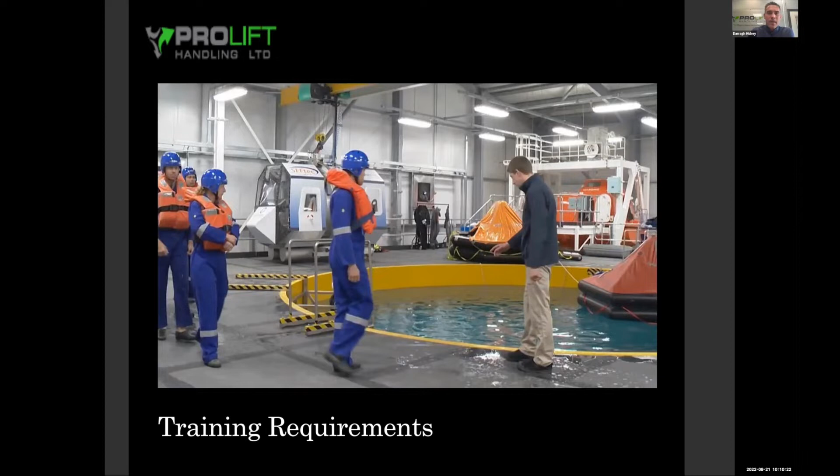So first and foremost, guys, before we kind of get into the training itself, it's important to know what type of engineer should actually be expecting turbines, because there's no point getting an engineer involved and then we find out that he's afraid of heights and you have to spend €20,000 on training. And it's happened. It might sound silly, but from our experience, we're doing this about seven years now for the turbines. A fitter background or a trade background is ideal, whether it be electrician, hydraulics or fitter.

There's some pretty technical products in the turbines, such as the service lifts, and they require assembly, dismantling, inspections, and repairs. So it's not just a general inspector that would examine chains and lifting accessories. Ideally, a fitter background is required.

As I said, they can't be afraid of heights, guys. You're up 100 meters in the air and these things move. When you're on top of the turbine, they move with the winds, and they have to move. And then you're climbing ladders 80 meters tall, so you have to be physically fit to do the job.

It might sound really obvious, but these are the questions you have to ask yourself. If you have a team of 10 engineers and you're thinking one engineer should inspect it, go through these questions and find out who will be the best after all of this.

And they have to be comfortable around water, obviously, because it's a water training course. And good with training courses, whether online, and fit to travel, able to travel to Germany like our engineers have for the actual Hailo lifts.

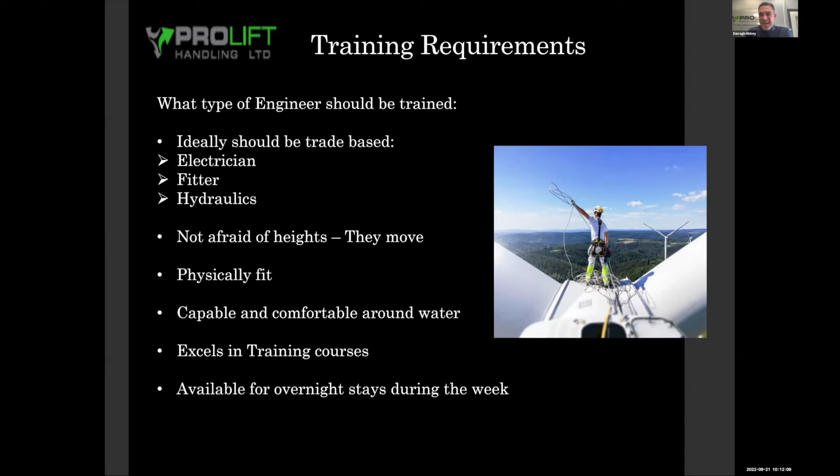The last point, guys, is these turbines are sometimes in remote places, so your engineers have to be willing and available to stay overnight. Like I said, there's no point in spending 20,000 on training, everything's great, but 'can't stay away this week, lads' - it's not going to happen. So they're just the little things to look out for when deciding what engineers should be trained.

When I move on to the actual training, guys, it's the GWO training that's really mandatory, and that's the Global Wind Organization. They're a bit like LEEA - they set the standards for a safer, more productive workplace, but specifically for the wind turbine sector.

They're a non-profit body, founded specifically for the industry itself. The standards are created by the industry for the industry, and that's very important because you have all stakeholders involved in the industry helping to push the standards. That's the only way standards can improve the whole time, with real-time feedback from all the various stakeholders.

The members are the global leading turbine manufacturers and the owners - like state bodies, and manufacturers like Vestas, so to speak. They're all involved in this GWO, and basically they identify areas of concern and try to develop a course around that to push the standards.

So the mandatory courses, guys - we do the turbines ourselves here in Ireland, and there's about 5 days of training that's mandatory, and they're all GWO courses. The first course you have is the GWO Sea Survival and Boat Transfer course, which is 1 day.

That basically goes over water safety. You'll be in a swimming pool, you'll learn how to deal with falling into the water, how you get out, and stuff like this. Because the sea can get pretty rough out there, and you have to wear the right gear. So it's a priority that your guys are prepared for this - if something does go wrong, what do we do?

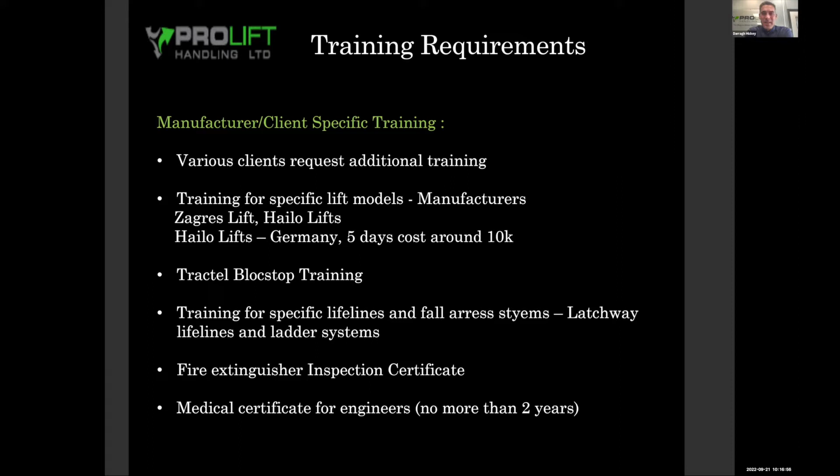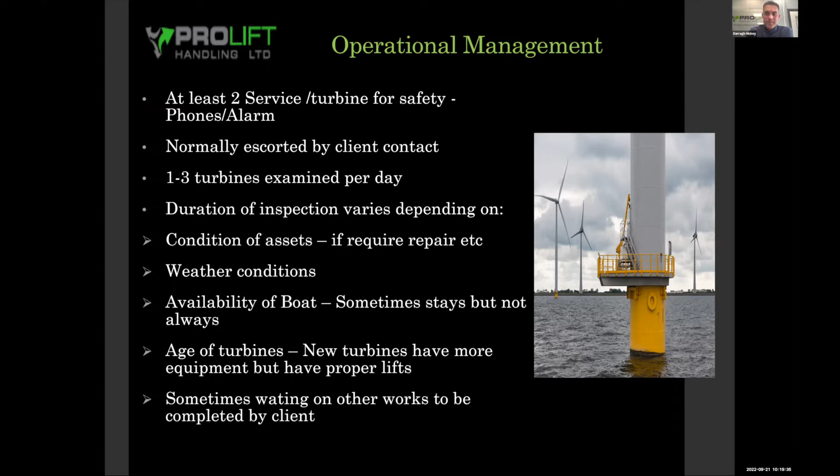And then finally, like I said, sometimes we have to wait for the client to finish their maintenance works until we can leave that turbine and go to the next turbine. So that just kind of gives you an overview of the amount of engineers required and things that can delay the examinations of the equipment within the turbine itself. And then we just have the 7 steps for planning, really.

So, step 1, make sure all our risks are controlled, check for good conditions of all equipment. These are basics before any job. We must have our certs for all the equipment we're going to use, our load cells must be calibrated, the basic stuff. That's the same for the offshore turbines themselves.

The key one here is plan activities in advance. You can kind of get an idea of what weather's coming the next 3 or 4 days. So our service manager who's booking in this work keeps an eye on the weather. He's in constant contact with our clients to book in some days. And there will be situations where you have 3 engineers booked up for the week, everything's good on the Friday, come Monday the weather changes and that job is cancelled, and you have to find work for those engineers as well. That's the reality of the situation, and it does happen, for reasons beyond our control, such as the weather itself.

Number 3, only authorized trained people, and that goes without saying. It's a very regulated industry. Your engineers have to be up to speed. They have to have all the correct certifications. You have to have their certs on you. We give them access to the certs via an online portal as well.

And then you have to wear the right equipment, whether it be the immersion suit, the life jackets, your walkie-talkies, and then you respect the rules during the transfer. Each boat will have their own specific rules, but they don't change too much. When you do your GWO course, they specialize in the actual transfer itself, what to watch out for and how to do the transfer.

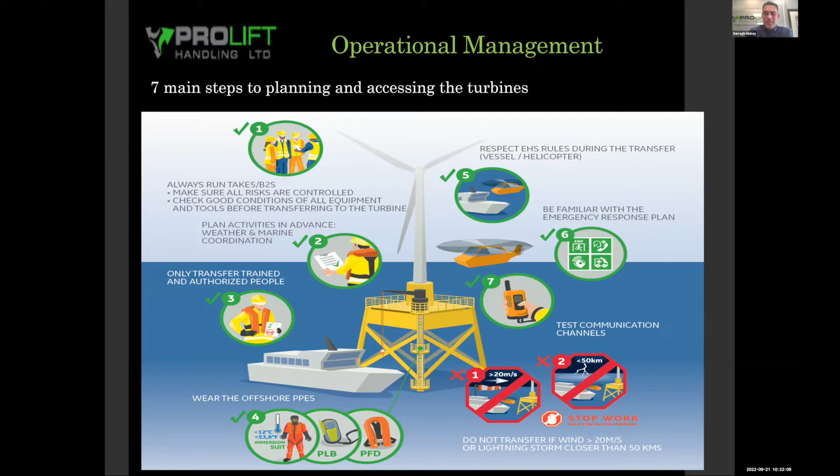So what equipment is examined in turbines? Well, there's a fair few different types. We have the service lift itself, which is probably the most technical equipment, whether it be an Avanti or a ZARGES lift. There's lots of ladders, safety lifelines, general height safety equipment such as your harnesses, your lanyards, your retractable blocks. We have electrical chain hoists, gantry cranes, davit cranes and jib cranes.

Then we have lifting accessories such as your shackles, web slings, chain slings, lifting points. And probably the most popular item by far is the man riding anchor points, which are scattered all over the turbines. As I said, that's the lifting and height safety equipment. We also do the fire and auxiliary equipment, first aid supplies, and the accumulators and pressure systems.

Some clients do this themselves. In my experience, it's good to offer the whole lot, because what you want to alleviate is the expense for the client, where someone goes on, does all the lifting equipment and accessories, and you have someone else come on to do the first aid supplies, the auxiliary, the fire equipment, and the accumulators. So if possible, I think it should put you in a better position if you offer all of those items to be examined, more so than just the lifting and height safety equipment as well.

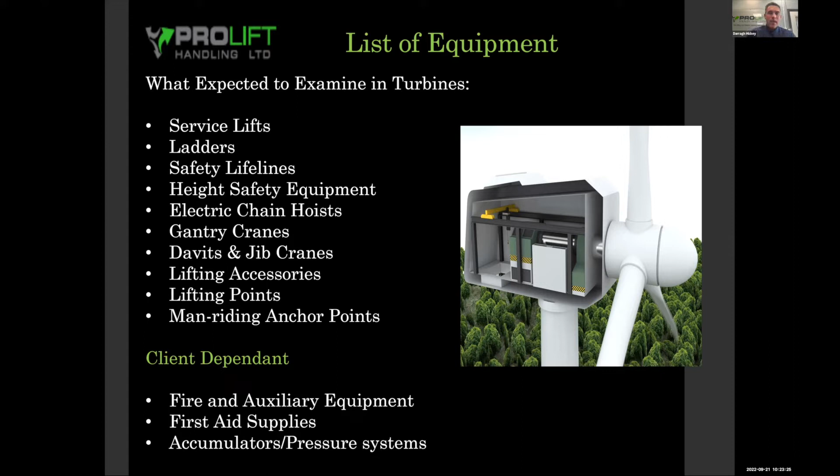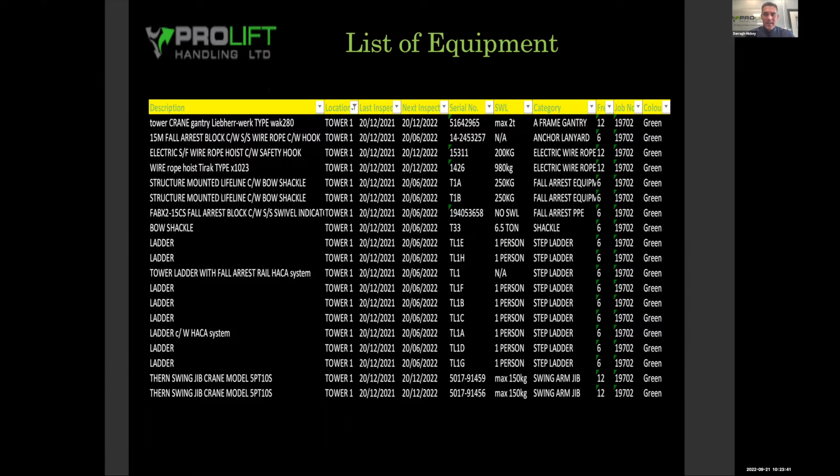That's a basic list of equipment in relation to one of the towers we did in Arklow. It's just a little snapshot of what's involved. We have a tower crane Liebherr, a 15-meter fall arrest block, a wire rope hoist, a Tirak, bow shackles, ladders. And just to give you an idea, out of that actual tower, there's 12 man riding anchor points and six lifting points. There are shackles, davits, ladders.

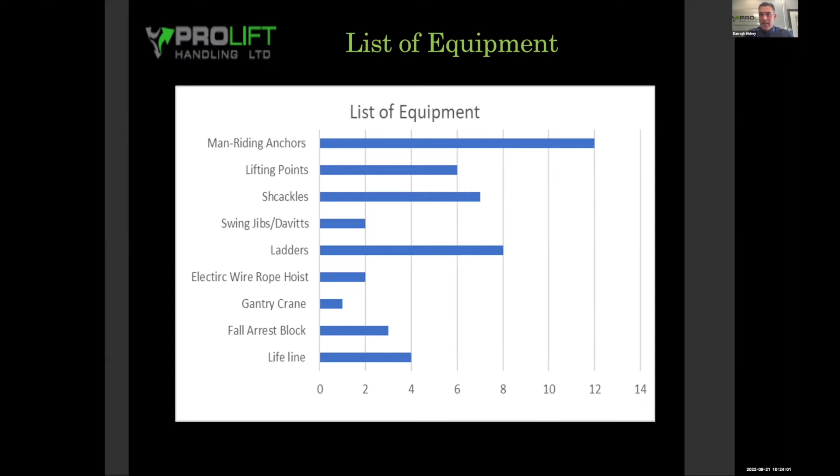But as I mentioned previously, these are older turbines that we do. So there's only about 40 assets, whereas with the new larger turbines, there could be anything from 90 to 140 assets. So that has to be kept in mind as well. The turbines are about 20 years old. There's no service lifts on them, so this sometimes slows down the work. And you're up and down the ladder, so this is why health and physical fitness is very important for the service engineers.

Modern turbine considerations: the service lifts are the most technical product on the actual turbine itself. And if you're doing the lifting equipment, that falls as part of the height safety equipment as well. You can't do one without the other. They won't send two different companies on to do this. These lifts need to be stripped, inspected, measured, and reassembled. They'll take 2 to 3 hours, that's if everything is good. Sometimes you'll find a problem that you have to deal with, and then that could take the whole day. There could be spare parts shipped out as well.

And like I said, it's an 80-meter Latchway ladder, and it must be inspected. How you inspect the ladder is you actually climb up the ladder. You're harnessed on, obviously. You climb up, you check the rungs for deformation, you check the spacings and everything like that as well. But it's a long way up, 80 meters, climbing a ladder, inspecting it. So that can take up to an hour as well.

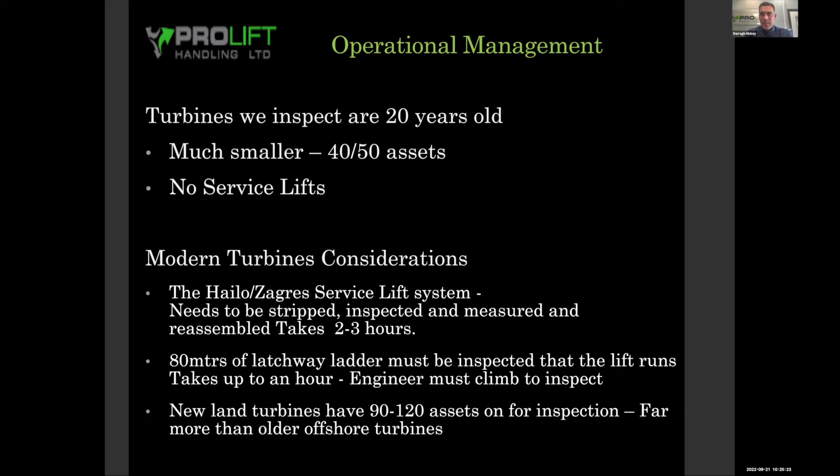I mentioned previously the new turbines of 90 to 120, it's up to 140 assets really. So far more than the older offshore ones that we have. But I know for a fact the newer offshore ones that will be coming over the next few years will have that amount of assets as well. So it's going to take longer to do the actual examinations. That's just a breakdown of the modern turbines that we do on land. Like I said, there's none offshore at the moment, but there's 72 fall arrest anchor points. That itself takes quite a while to do.

All the new turbines have service lifts also. But with the service lift, guys, you examine the lift, you do the maintenance, but you also have to inspect the structure the service lift goes on, whether it be the ladder or the ropes as well. So even with the service lift, you have to climb these to make sure everything is okay. Just because it has a service lift doesn't necessarily mean that the job is quicker. And we do first aid kits, lifting bags, fire extinguishers. So the same type of equipment as the offshore turbines, but just more quantity as well.

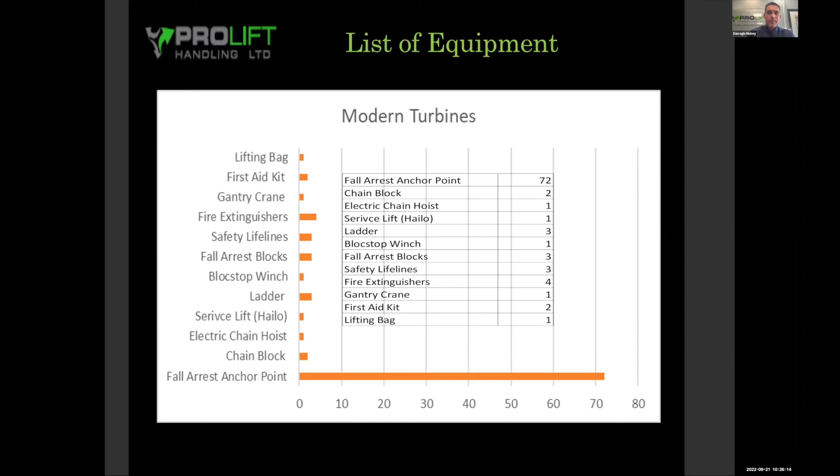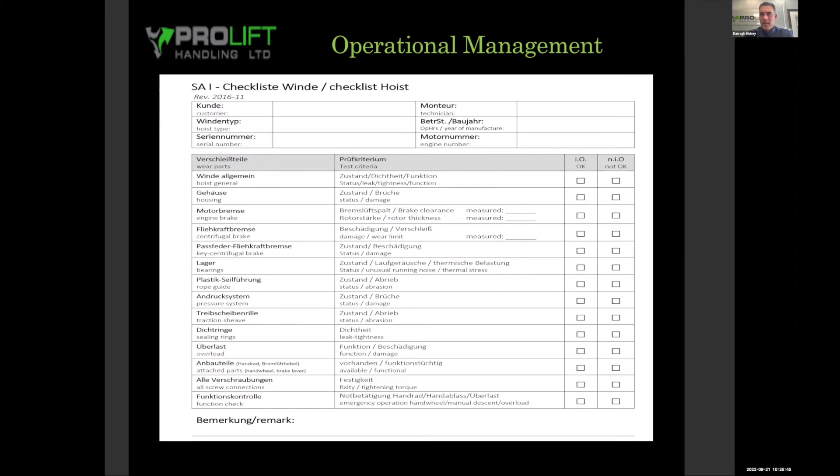I just want to give you an overview of the service lifts themselves and what to look out for. This is the general checklist we have. We check the hoist in general, the housing, the engine brake, the centrifugal brake, the key centrifugal brake, the bearings, the rope guide. And this goes back to my point where a fitter or a trade-associated service engineer, I think, is required, because you're dealing with hydraulics, you're dealing with electrical as well. There's a good few moving parts. So that's why I think a fitter or trade background is essential for doing these examinations. I just want to show you guys a short video on doing the actual lift.

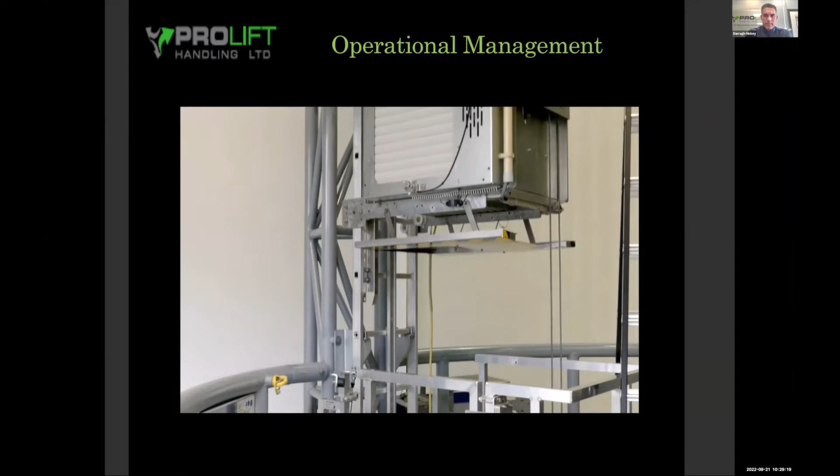Sorry guys, just want to give you a quick overview of how the actual lift works, what to look out for, to show you what type of service engineer is required, to give you kind of a basic grasp of that as well.

Critical to any turbine, especially offshore, is what to do when an item is failed or repaired. So basically, communication is key with the client. If something isn't right, they have to know straight away. Especially what is safety critical, immediate action required, or can you wait 3 months to get a part. That goes with any lifting equipment inspection job, but with offshore turbines, it really is essential.

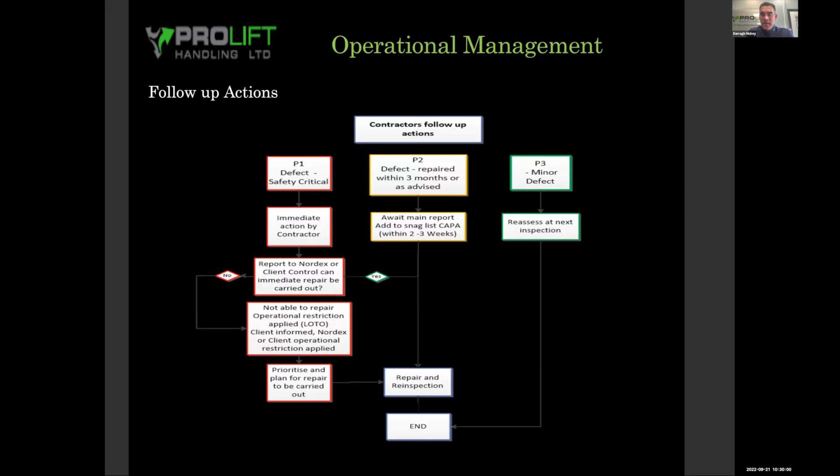So just to summarize, I took a bit longer, and I know Raffaello has a great presentation to go through now as well, but there's massive growth predicted in the UK and Ireland for offshore wind turbines over the next decade. I think they're looking to supply 10% of the EU's power, which is massive. So there's huge opportunity there. The great thing is, at the moment, it's a quality orientated sector, which pays well. There's good equipment being used, good guys in the industry. Let's hope it stays that way.

The concerns, like I mentioned already, guys, service can be cancelled at short notice. Cost of training is expensive, along with lost revenue. And it only becomes viable for you as a business to examine these turbines if you have some contracts in place for the medium term as well. And like I said, a specific service engineer is required. But all in all, guys, I think it's a very exciting industry, massive growth potential, if you have the right people for the job.

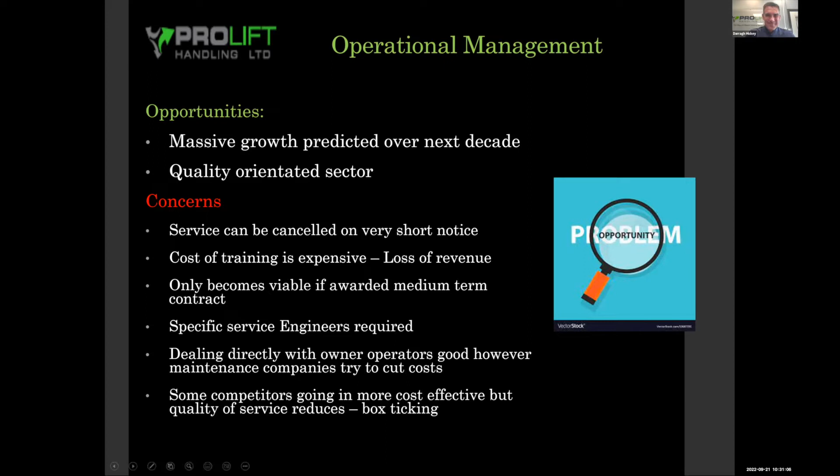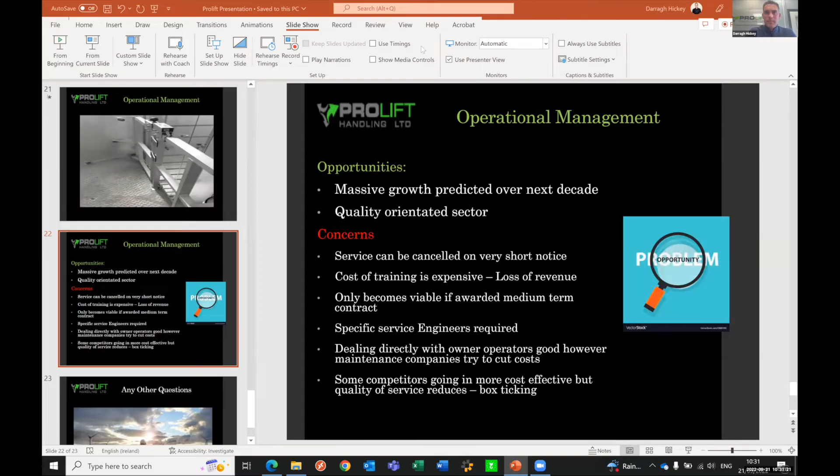I'm going to hand you over to Raffaello now, who has a great presentation from pewag, a much better presentation than I have anyway. Thank you. Sorry guys, 1 sec. Ross, did you want to introduce the next speaker? I can do that. I thought Darragh had done it. Darragh, thank you for that presentation. Whenever anybody talks about going 80 meters in the air, I'm glad that I sit in an office for a living. Raffaello, we're ready for you, if you want to share your slides. Thank you. Let me share the screen. Hope you can see it all right. Great, thank you.

So good morning, everyone. My name is Raffaello Marino, and I'm responsible for the renewable energy sector in the pewag group. pewag is a global market leader in manufacturing and distribution of premium quality lifting and lashing products, serving a variety of industries. Part of my responsibilities involve visiting wind turbine production and deployment sites worldwide, performing on-site safety inspections and recommending the best lifting and lashing equipment to use in any situation.

I'm just gonna move on. Today we're gonna look at the global wind energy market and any specific requirements in terms of lifting and lashing equipment needed throughout the wind turbine lifespan, from production to decommissioning. I reckon this will complement very well the detailed information that Darragh provided us with, and will give you a more general overview of what sort of lifting and lashing equipment is used throughout the lifespan of a turbine.

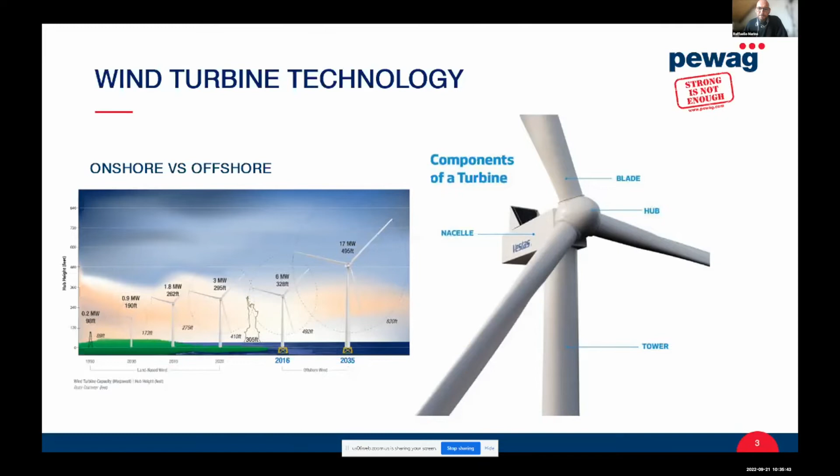Moving on a little bit faster, I wanted to share with you information regarding the composition of wind turbines. We're all familiar with the concept. There are two different kinds of turbines, onshore and offshore. To summarize these pictures, basically the turbines are made mostly of steel. That's important because the equipment we use is intended to be used in combination with steel, which is the main material used in both options.

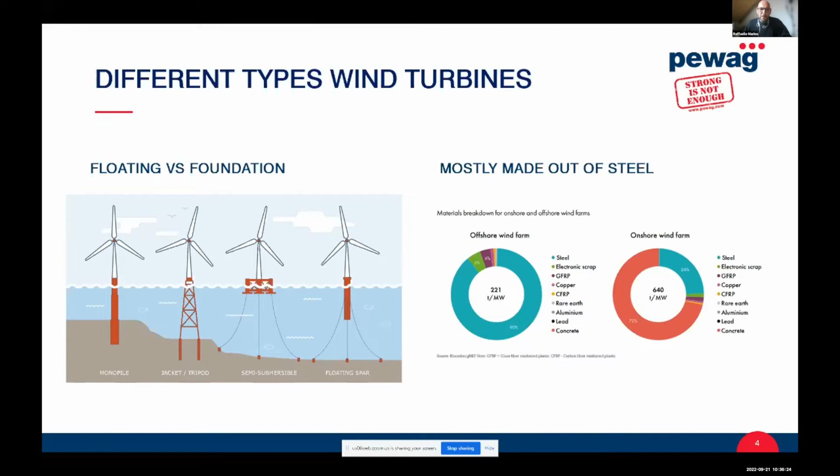I want to now dedicate some time to discuss the general market. As Darragh said, it's a gigantic market. It's fast growing, and the projection indicates that it will definitely double in size. Globally, wind power generated about 6.6% of the world's electricity in 2021, up from 3.5% in 2015 - that was when the Paris Agreement was signed. This makes wind energy the fastest growing source of electricity after solar.

The 93.6 gigawatts of new installations in 2021 brought the global cumulative wind power capacity up to 837 gigawatts, showing a year-over-year growth of about 12%. Europe remains the biggest wind energy market. New installations amounted to about 17.4 gigawatts, 14 gigawatts onshore and 3.5 offshore.

Permitting bottlenecks and global supply chain issues continue to delay the commissioning of new farms. Onshore wind made up 81% of new installations, while offshore wind made up 19% of new installations, following basically the same path.

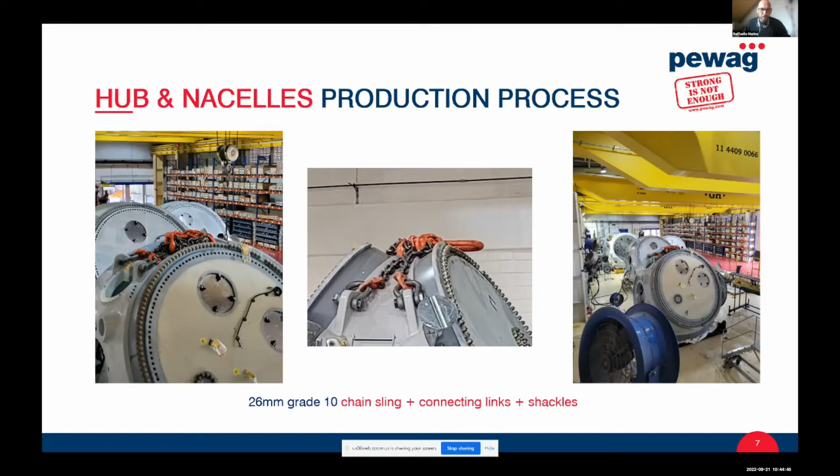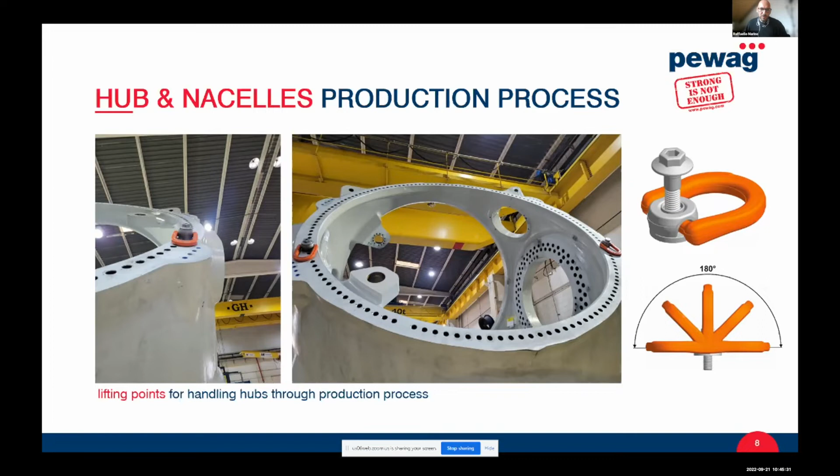More or less, with minor differences, these are the typical lifting equipment used during the production process. Some more examples depending on the particular application. This is all the production stage. This particular plant is one I visited in South America, but I could see that this way of using this lifting equipment is basically common to every turbine plant.

During the production process, regardless of location, it's always rotatable lifting points that are used the most. In this case, we see a variety of different kinds of lifting points. I just wanted to give you a general overview, but mostly there are 3-4 models that are common across the OEM turbine manufacturers.

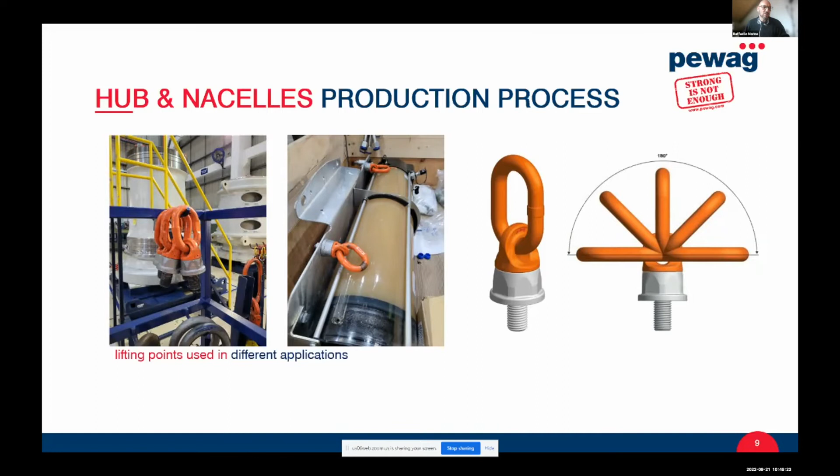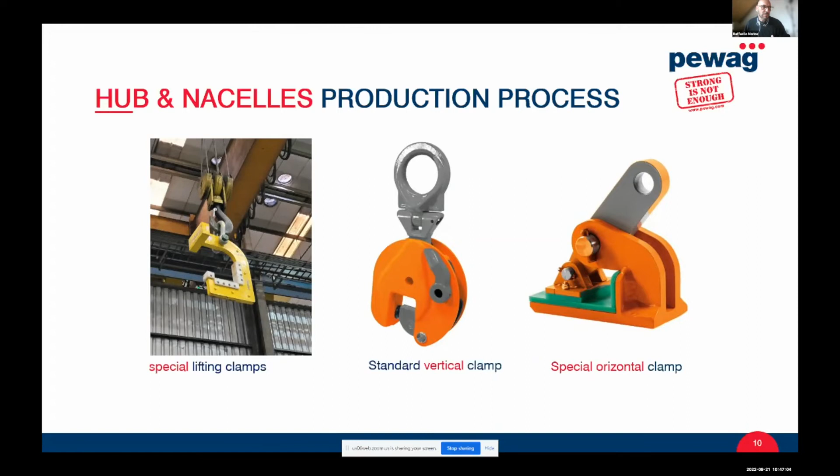Another article widely used during the production process is the clamp, the lifting clamp, which is by far the safest way of handling steel plates, a basic component. Later in the next slides, we'll see in more detail how the lifting clamps are used and what component I'm talking about. Basically, a combination of standard vertical clamps, special horizontal clamps, and special clamps are used to handle the big steel plates, which we know represent a big part of the component.

So then we move to the monopile production process. In the previous slides, we saw the nacelle and the other components used at the top of the tower. For the base and the foundation, which represents a big part of it, we need to discuss separately. That's called the monopile, the foundation, and it's based on steel.

It's important to say that more than 80% of the wind turbines currently installed are based on monopile foundations, basically steel. The monopile production market is concentrated in Europe among a few manufacturers, so lifting clamps are by far the safest choice to handle such steel parts.

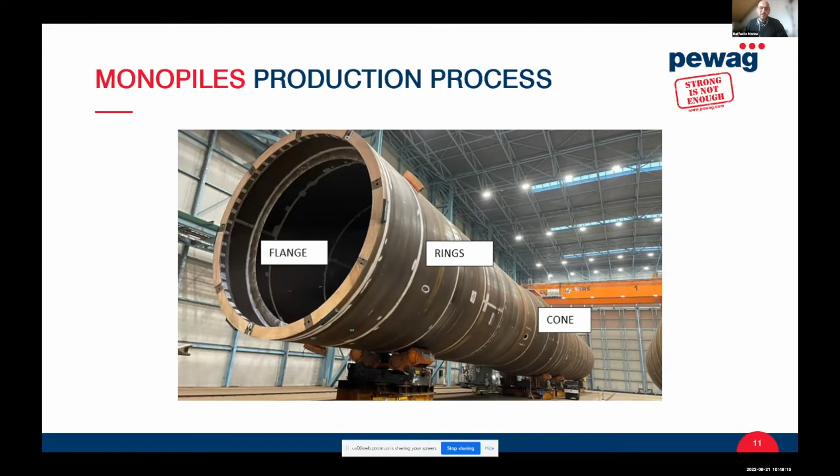Looking at the picture here, the flanges are pretty thick plates, so we need special lifting clamps capable of opening the jaw enough to accommodate such thickness. I wanted to give you examples of the most common lifting clamps used during this stage, which can be 30-35 tons capacity. The weight is sizable, each clamp can weigh up to 300 kilos. It's heavy equipment, but widely used during the production phase for monopiles.

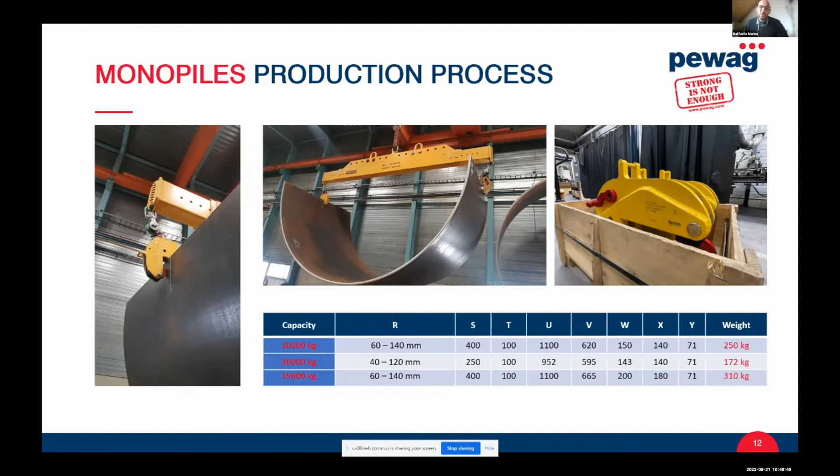This is used in combination with the next kind of lifting clamp, which in this case we manufacture specifically for one particular monopile producer, according to some specific requirements. We were asked to manufacture something that could be operated by one single operator, who should be able to load and unload heavy pipes without leaving a safe position.

That was one of the requirements, and we designed it with a very strong and unique form that can be used in very limited spaces. That was another requirement, for example loading or unloading from boats or trucks. The design is pretty robust and needs to withstand and meet the toughest conditions. The clamp also needed to open and balance in position, so it was easy to place onto the pipe.

Of course, safety is the most important thing for us. The mechanism of the clamp design is such that it clamps and fixes onto the pipe without damaging it, and can be safely handled. The design is scalable and adaptable, and of course the price needed to be competitive. This is just one example of the general requirements for monopile manufacturers.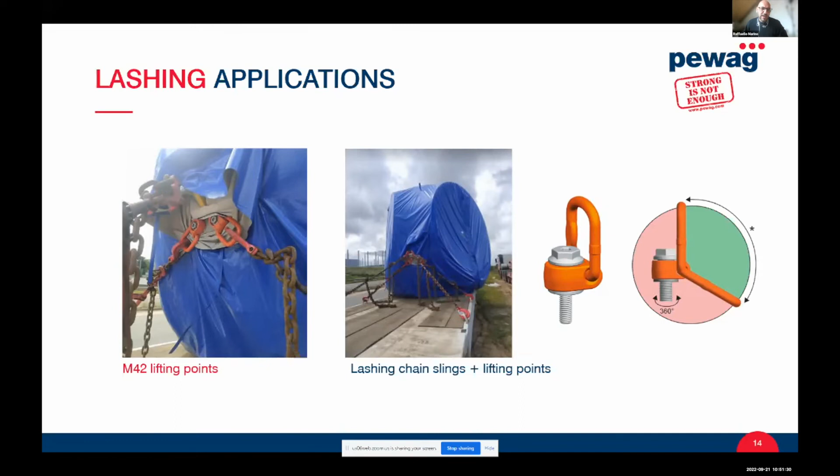Big size lifting points are used, attached to the component in combination with lashing chain slings grade 100, grade 120, and lifting points attached to the truck or base. Normally those lifting points are rotatable. In this particular case, it's a special article which fits perfectly to this application.

Moving on to logistics, when it comes down to logistics and installations, I wanted to give you an idea of what is normally used. We have to take into consideration that the average rotor diameter rose basically 50% over the past 10 years, so the bigger the better - that's the name of the game when it comes to wind turbines. So the equipment capable of handling those components needed to grow accordingly.

In this case we see lifting frames, a particular one with a scalable design that can be adapted to any size. In this case we see a lattice beam assembly, about 150 tons, length of 55 meters, which was attached to a big crane at the harbor.

This example shows the lattice spreader, one type of spreader that can be used because it's very lightweight compared to modular spreader beams, and more cost efficient. Basically, it's a green choice, so to speak.

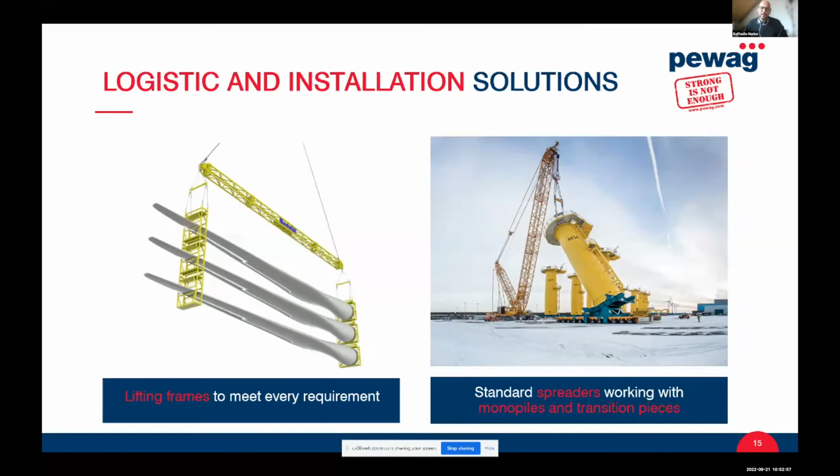These are actually used across industries, not only in wind energy, but the same product is suitable for all industry sectors such as marine, offshore, and subsea.

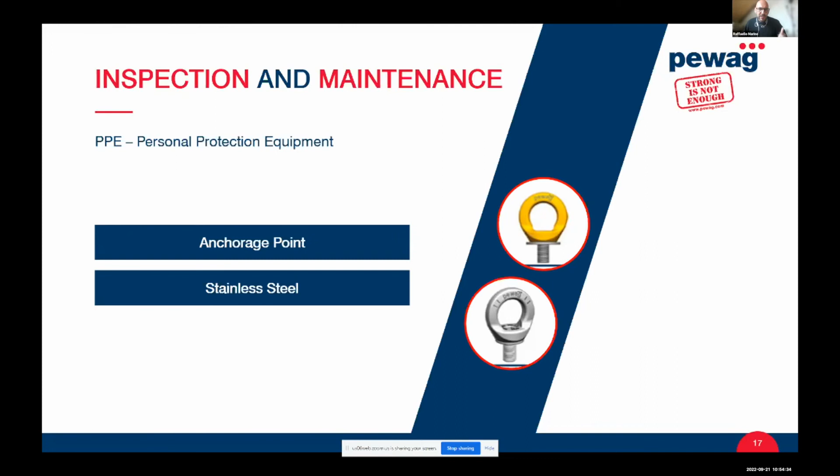Going to the closing of my presentation, I just wanted to recap on the lashing and lifting equipment, which I believe is the most precious, valuable information I can give you. To summarize: lifting points, chain slings of different grades - 80, 100, 120. I can guarantee you that the biggest wind turbine manufacturers privilege premium manufacturers, obviously with certificates and everything. There isn't really a precise guideline on when to use polyester slings instead of steel, but both of them are used. So these are basically all the equipment that is used.

By all means this is not limited to what I've shown you, but in the limited time we had, I think we have a good overview.

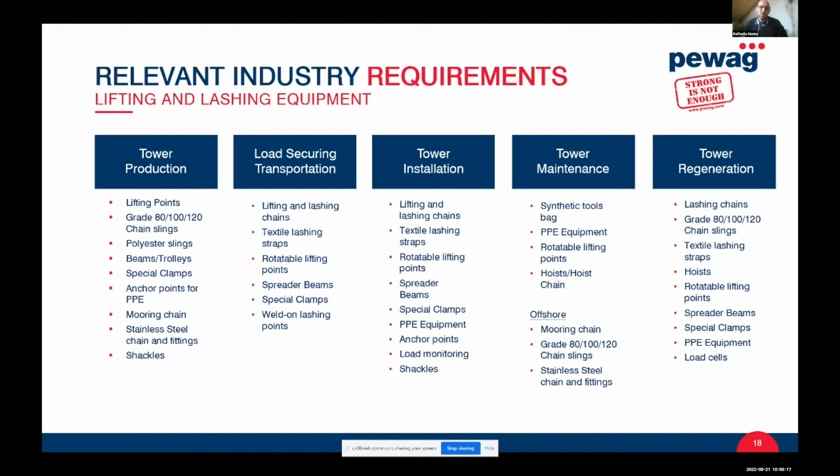To wrap up my presentation, I just wanted to remind you, echoing what I said, that in general the global wind turbine market production is bound to grow to meet requirements - doubling in a few years and 10 times the size by 2050. At the same time, the global wind turbine maintenance, repair, and overall MRO market is expected to reach a value of about 232 billion in 2027, from 81 billion in 2020 - registering once again a tremendous growth in a few years.

Well, that basically concludes my presentation. So thank you for your attention.

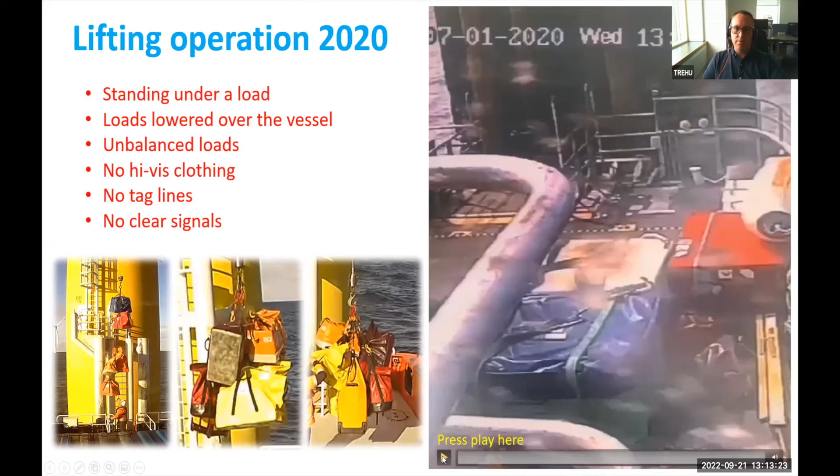In 2020, we did a review of our lifting operations. As you can see from the images on the lower left, they weren't of any standard and had no planning at all. I'm going to play a little video to give you insight into how lifting operations were conducted at the time.

You can see in the video the person on deck stands under the load, is unbalanced, there's no high-vis clothing, and there's no communication between the slinger signaller and the crane operator, which results in time loss, extra CO2 being produced, and increased fuel burned by the vessel. So by optimizing the lifting operations, we save CO2, save on fuel, and save on time, which equals more production of the turbines.

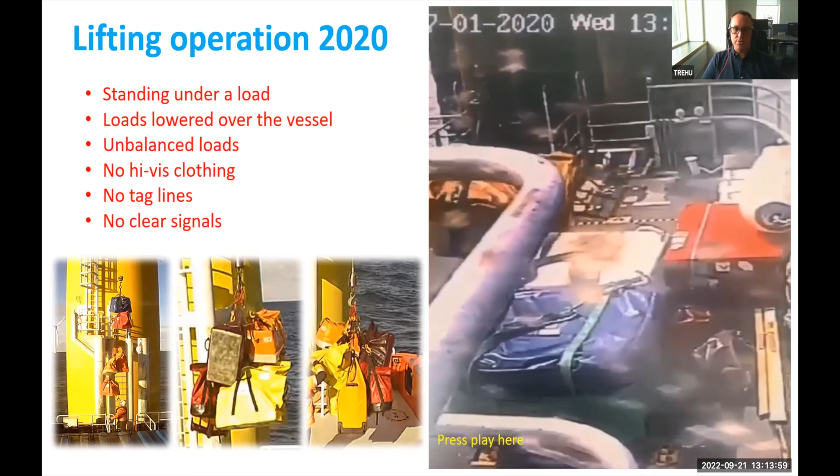You can see there the load was just landed anywhere they could, due to the lack of communication.

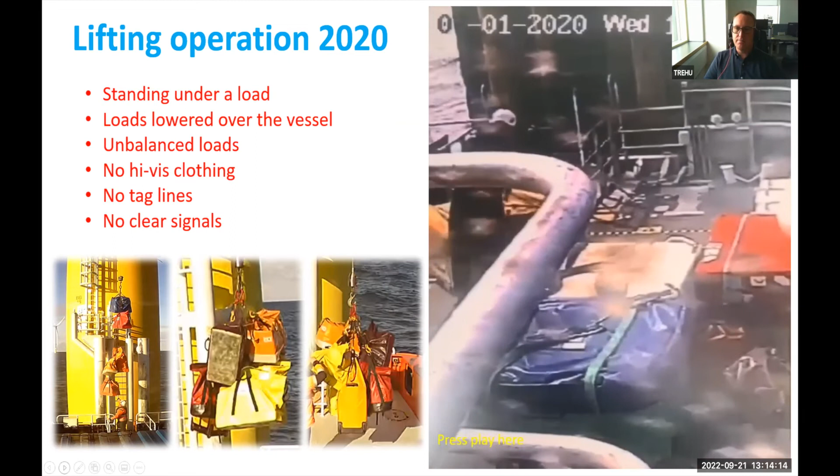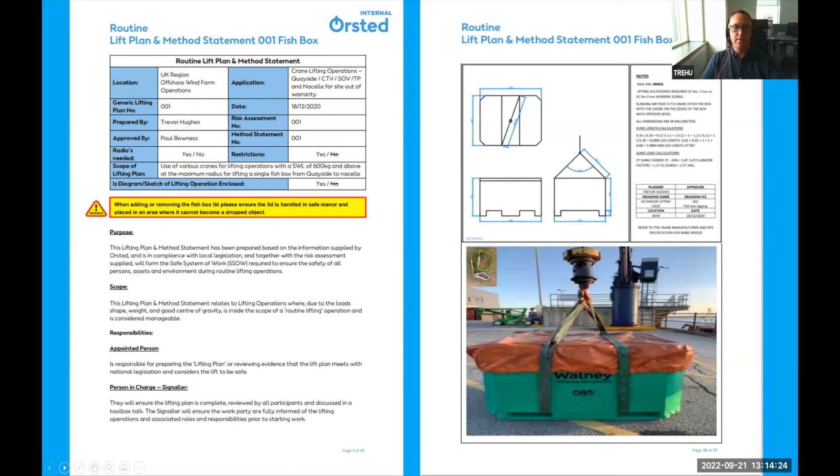So what do we do now? For every lift we do, we create a lift plan, and every load is planned to be lifted when going offshore. We give guidance on how the lifting accessories and equipment should be used. Now I'm going to share a little video which we created to help our standardization journey throughout the business.

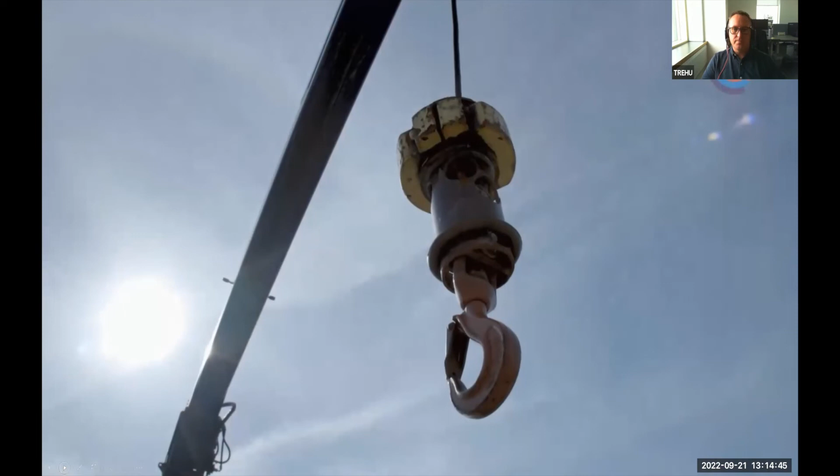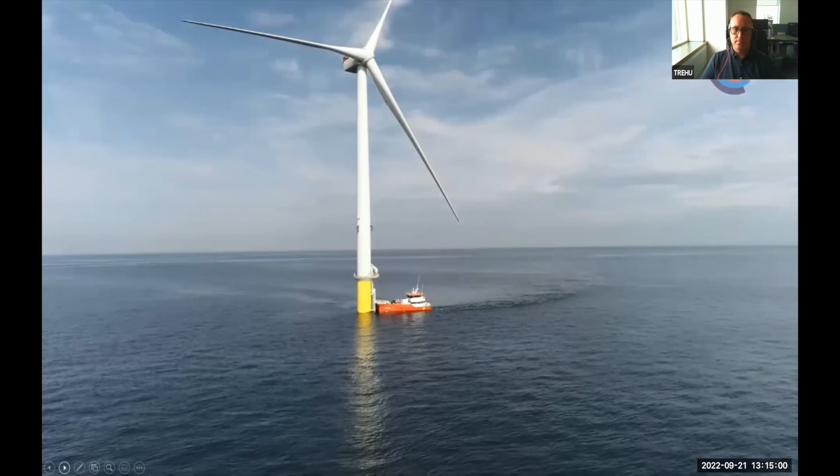Without lifting, operations can't work. You need to get maintenance tools, oils, and greases up to the turbines. The only way they can get there is via the boats - they need to be lifted onto the turbines. We could be doing hundreds of lifts a day, and each one has the potential for a dropped object or serious harm to people. So it's vital that our lifting operations are safe.

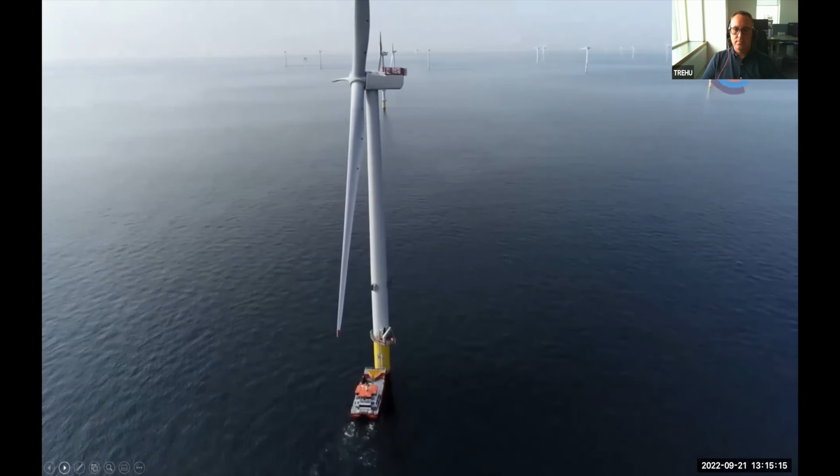The dangers lie in many aspects. The biggest thing that can go wrong with a lift is it can fall on someone and they can be dead within one second flat - that's it, a hard hat's not going to save them. Being complacent is very dangerous and people can get seriously hurt if not killed. Every lift can potentially be dangerous because it's falling from 20, 30 metres. It doesn't have to be heavy to go on deck, but when it comes down, the force is going to be a lot heavier. Even just a small spanner in a bag could potentially kill someone.

The day of the incident, we had just been at a turbine and we had sent the packs up to the turbine, and we were doing the cargo, and there was a sling connected which I didn't see because it was hidden. Exactly when the crane started lifting, I managed to step into the sling, and the sling took me up with the crane.

I got a couple of meters up before they realized that I was also part of the cargo going up towards the turbine. Since I was below the cargo, they couldn't really see me when I was trying to signal them to stop. But then the captain at the moment sounded a horn, and it was just a couple of seconds before they realized something was wrong, and they took me down.

I guess it was more afterwards that you started thinking about what could have happened - if I had already fallen on deck and got caught up by my foot instead, with my head towards the deck, or something like that, or if I had gone up 15 or 20 meters before something happened. Then you start to realize it could have gone quite badly.

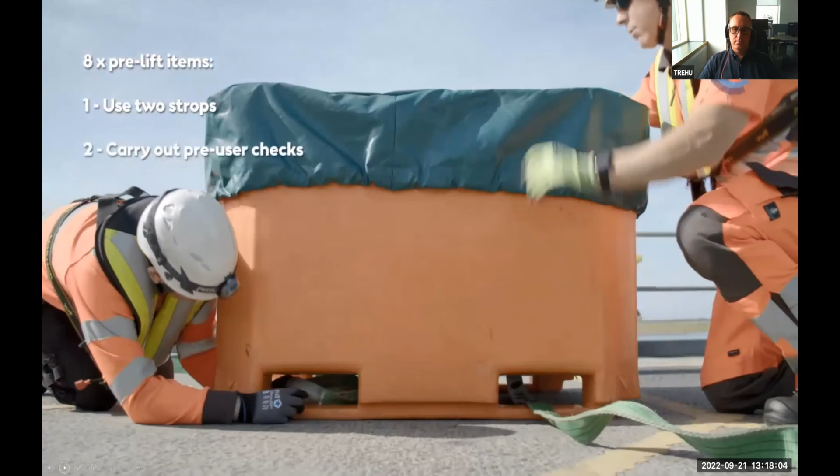They'll use 2 strops. Once we've carried out the pre-user checks, they need to be threaded through the fish box and then put in a choke hitch, opposite bites, making sure the slings are moved to the centre of the box.

It'll then be connected to the quayside crane, lifted up approximately 300mm, a pre-user check done, making sure the load's stable. We'll attach a tag line, then it can be slewed off towards the vessel.

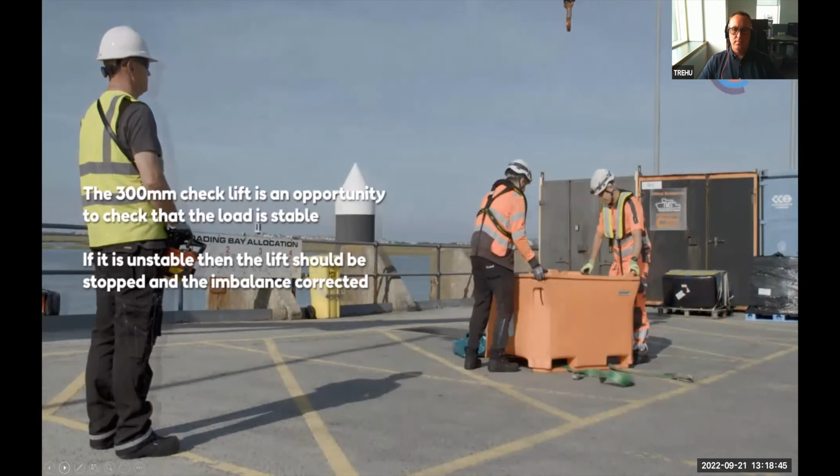So the things we're checking on a fish box lift - slings are okay, they're in test, there's no cuts or holes in the slings, and they're the right slings for the job. Normally 2 tonne, a minimum of 4 or 5 metres.

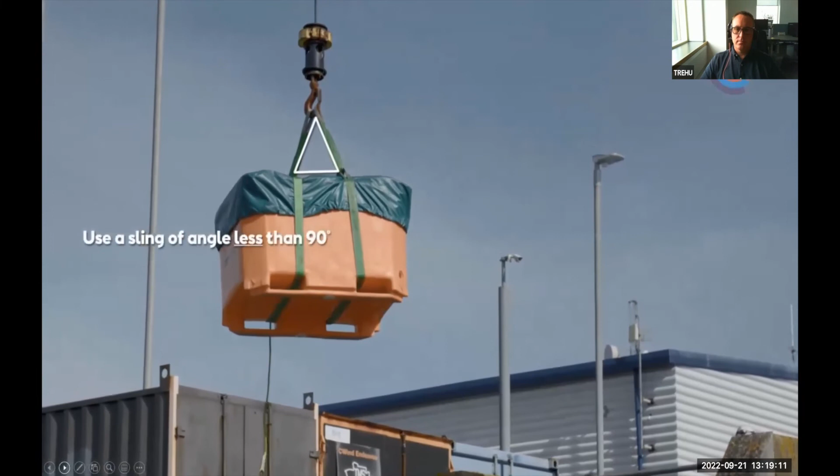So once we've slung the load with the choke hitch and the slings are in the centre of the box, what we're aiming for is a sling angle of less than 90 degrees, because that's what the lift plan has been done to suit.

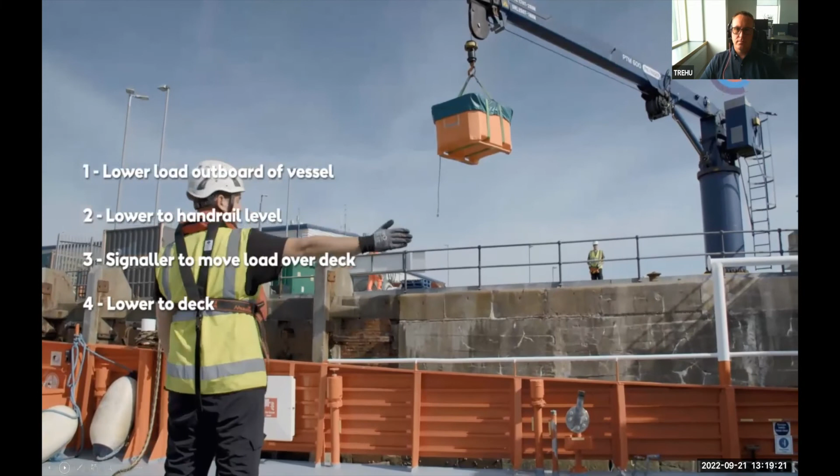The deckhand, who's now taken the role of slinger signaller, can instruct them to lower the load down towards the vessel, but on the outboard side of the vessel. Once the load is lowered to handrail level, the deckhand stroke signaller will signal the load over the vessel deck, where it can then be lowered down to the deck.

Then it can be lowered down to the deck. Then the deckhand will detach the load and the crane can be parked away.

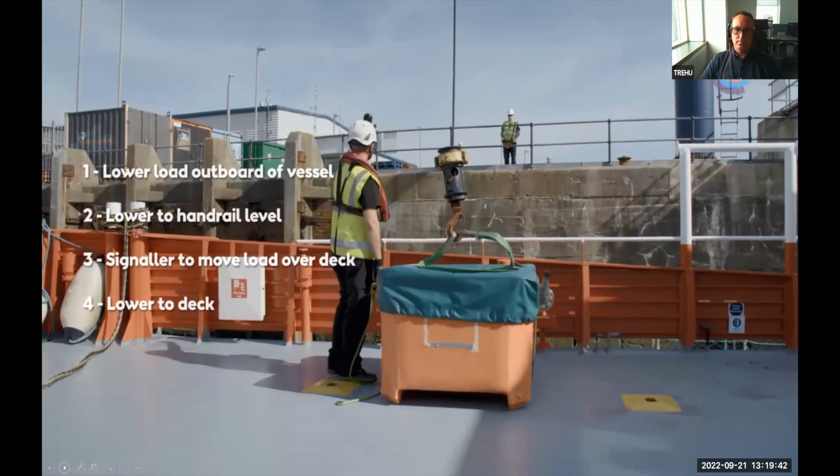So when an item's decided it's going to go in a bag, stores will pick the item, they'll weigh it, they'll find a bag which has a suitable safe working load. They'll do a pre-user check on it. They will then load the bags and make them available to go at the quayside for loading.

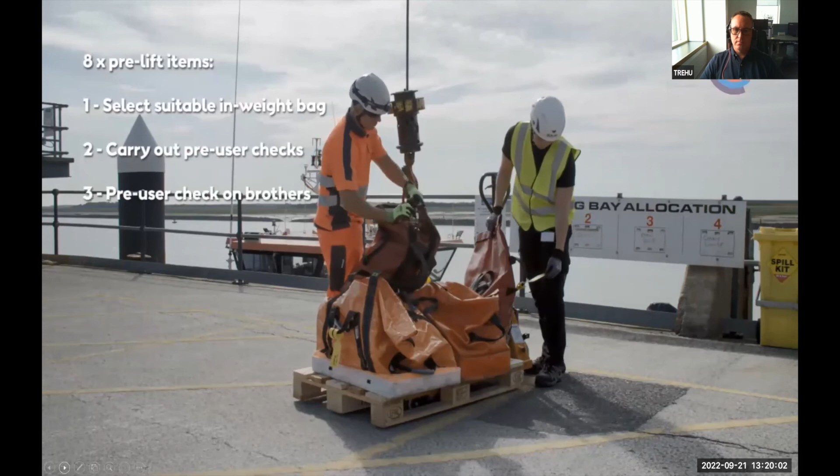Then we'll use what we call a set of brothers. We'll do a pre-user check on them, and then the bags can be clipped to the set of brothers. One more check before the final lift's complete to the vessel. Once everybody's happy, then it can move to the vessel.

So when we're doing a bag lift, we're doing our pre-user checks, and in that we're checking there's no tears or holes in the bag, we're checking it's in test, all the webbing's good, and once it's on the brothers, we're checking the hooks are out, and there's only 1 bag per hook.

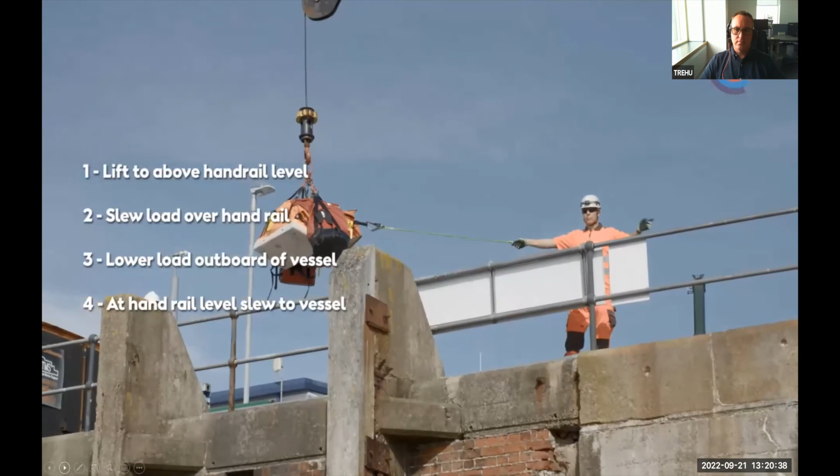Once the vessel gets out to the wind farm, it'll push on the transition piece. The technicians will go up, do the pre-use checks on the davit crane. The technicians will crane down to the deckhand, who now takes the role of slinger signaller. Take it up, do a pre-use check, clear the handrail, take it away from the vessel, then it'll go up onto the transition piece.

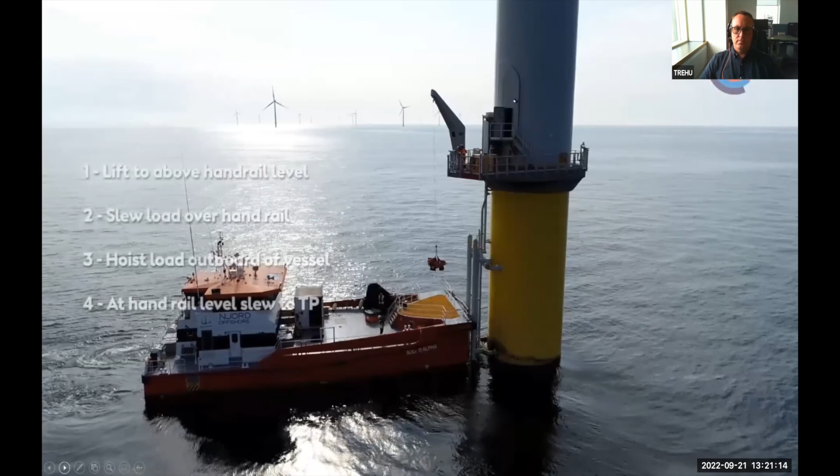Personal risk of getting hurt at your workplace. It is very easy to take shortcuts and maybe not use the helmet because you're only going out and doing a single lift. You do it once, or you're in a hurry. Usually it's then that injuries and accidents happen as well. That and stress, I think, is the most common grounds for injuries on board, and also, I guess, on the turbines and the platforms and so on.

So to follow the procedures is basically to minimize your personal risk of getting hurt and getting injured. There's a lot of changes been made recently to lifting operations. Take the time out to make sure you understand those procedures. If you can see improvements, put them in. Let's strive for operational excellence. That's what we want, and we can only do that with you.

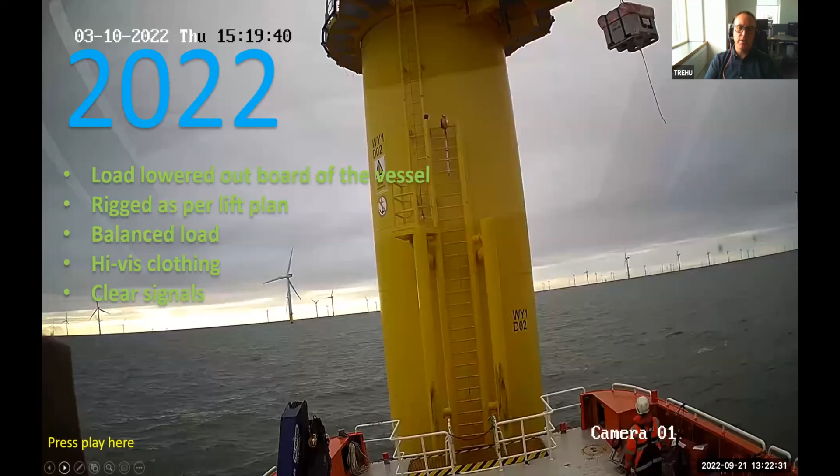So since the making of that video, we've actually changed a couple of things. We've upgraded the type of lifting bags, and we've also removed the plastic loop out of the taglines to comply with British standards, so there's no loops or knots in the tagline. So now I'm going to fast forward to 2022 to show you the improvements we've made. What you're seeing in this video is the fish box actually being lowered outboard side of the vessel. So if anything was to fall, it would land in the sea and not on the person or the vessel.

The tagline is now mandatory and added to every load. That's to allow the deckhand to be 1.5 meters minimum away from the load, as you've seen the person get it lifted up in the previous video. We've got the deck crew in high-vis clothing with good, clear, identified signals to the crane operator as well.

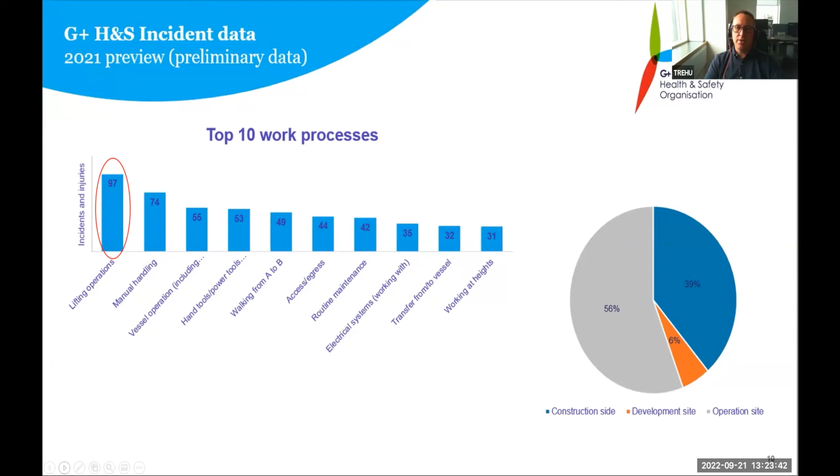So you may be familiar with the G+, the Global Offshore Wind Health and Safety Organisation, and lifting operations is within their top 10 processes. And if you look at the pie chart, you'll see 56% of it is in operations. That's the main focus area. They also published this in 2022 and have highlighted the section everyday low complexity routine lifts. And that's what I've just been showing you there.

It's not the people erecting the turbines, lifting the main components. It's when the technicians are offshore and they're lifting their daily service and maintenance tools and equipment. That's what's causing the main issues. And it's a bit of hearts and minds as well. It's upskilling the mindset and getting those people aware of why we need to change.

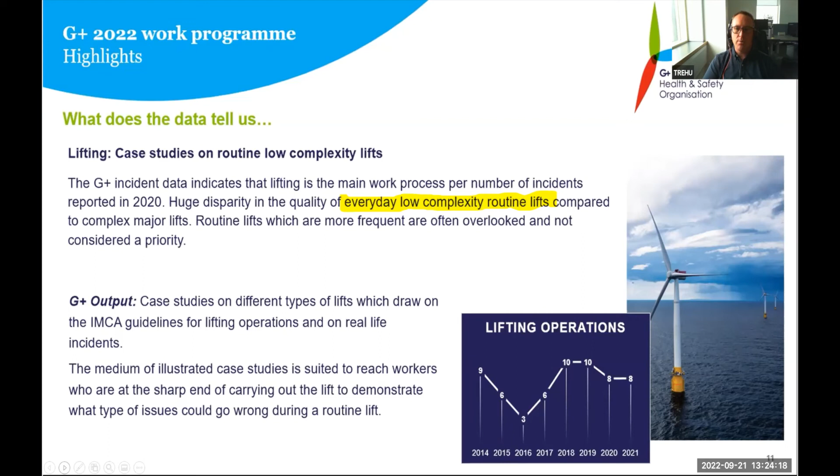So the first is for Dara, and it's from Anthony Hope from Sparrows. Anthony asks, does the person who carries out the repair and maintenance activities on equipment perform the statutory inspection and/or thorough examination too? Yeah, from our point of view, we carry out the thorough examinations along with the maintenance and repairs on the items itself as well. So yeah, we do both. Some companies may require to split it depending on the manufacturer, where one company does examinations and the other company does repairs and maintenance on it. But in Ireland, we do both.

A question from Ashley Gray, who asks, who chooses the assets that go in the wind turbine? That's for either of you. Sorry, who chooses the asset that goes? Well, normally the OEMs, the manufacturer itself. There's some common standard, basic requirements in terms of technical characteristics, safety, regulation and so on. So that's why we see that, for instance, lifting points are used across the board, depending which OEM we're talking about. So the article might change, the size might change, but basically that's the type of article that's used.